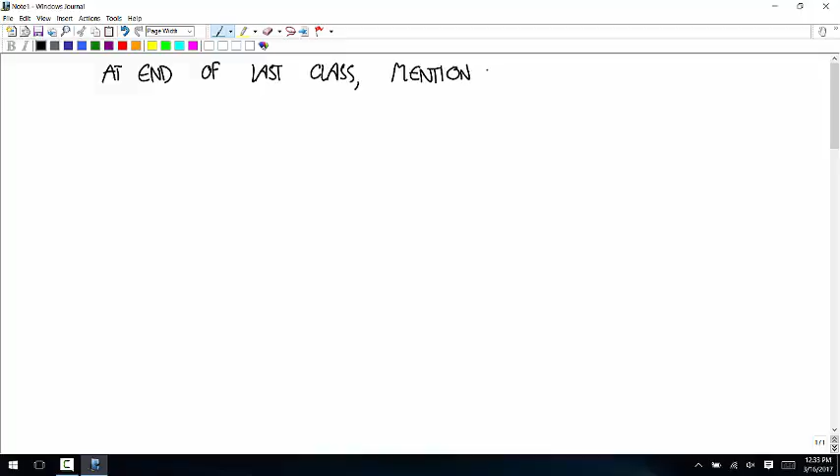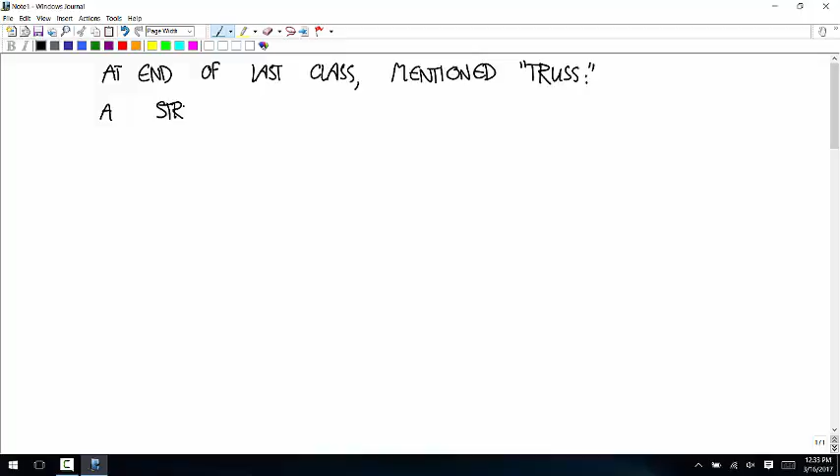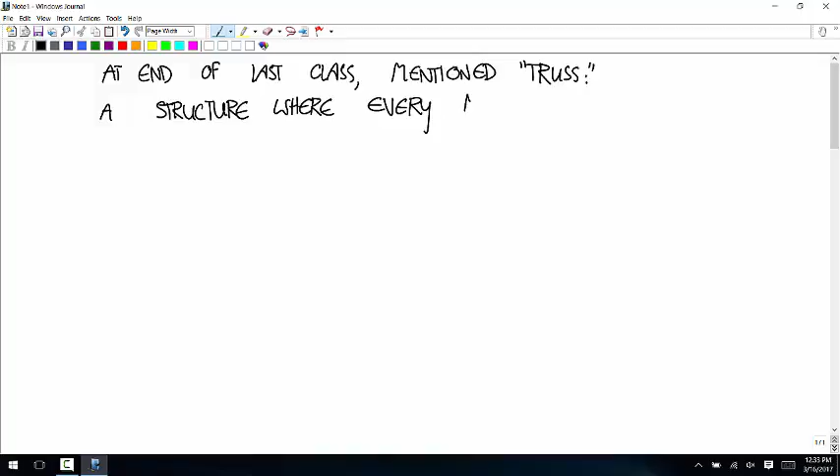So at the end of last time, I introduced this idea of a truss, a thing that's made out of nothing but two force members. So a truss is a structure where every member is a two-force member. Does anyone remember what's special about two-force members? Yes, they have to be equal and opposite, and they can either be away from each other or towards each other. And what that means is two force members are either in pure tension or pure compression.

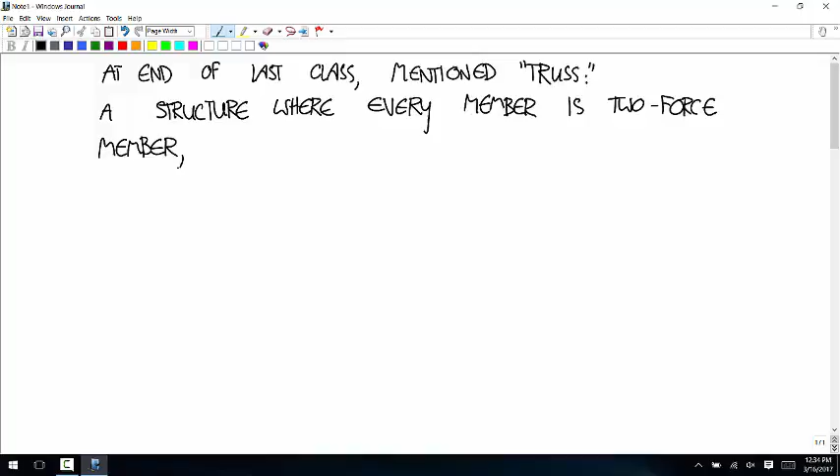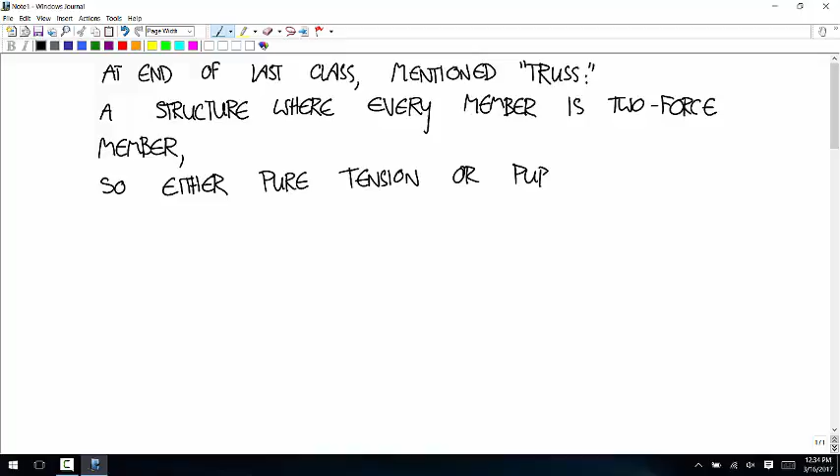So what I want to do is give you a truss, and I want you to solve it in little groups up at the board using the method we've talked about. Then when you're done, I'm going to go through it using the truss simplification. You'll see it is shorter, there's fewer equations, and you'll get the same answer. And then it's in your notes, so later if you take a class where you need to understand more about how the truss simplification works, you have something.

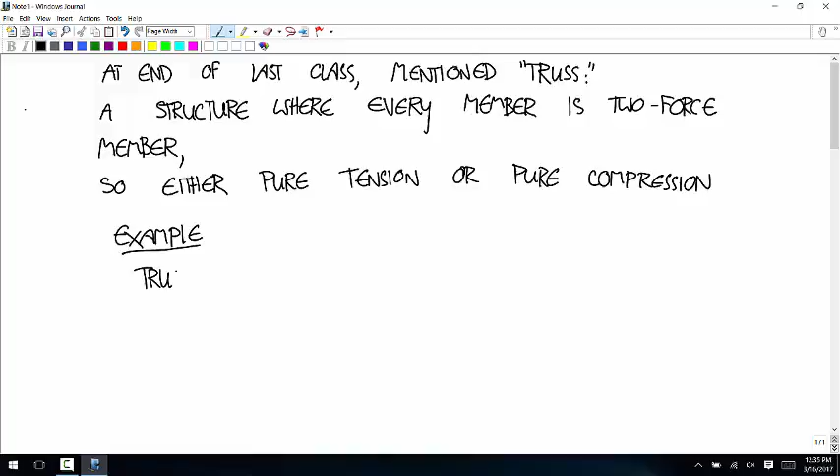So here's the example problem. Maybe the key thing to remember is that we treat it exactly the same as any other structure. We don't have to categorize structures into different things, like this is a truss, this is a frame, this is a machine. If you have a collection of bodies, you can solve it using the one approach that I talk about in this class.

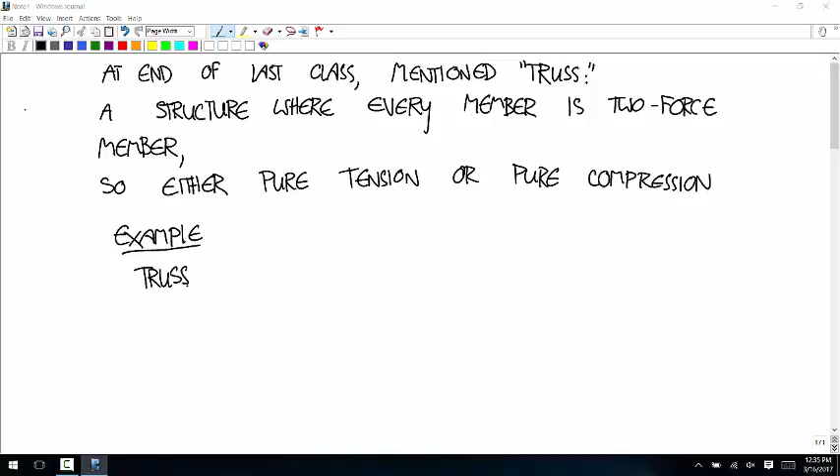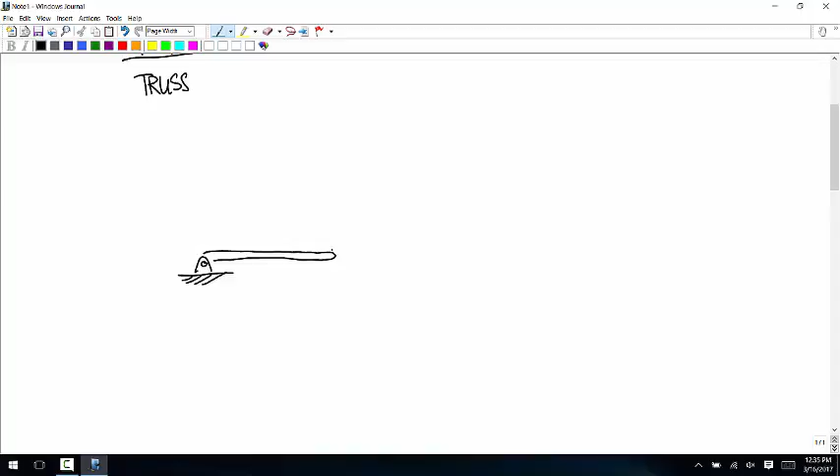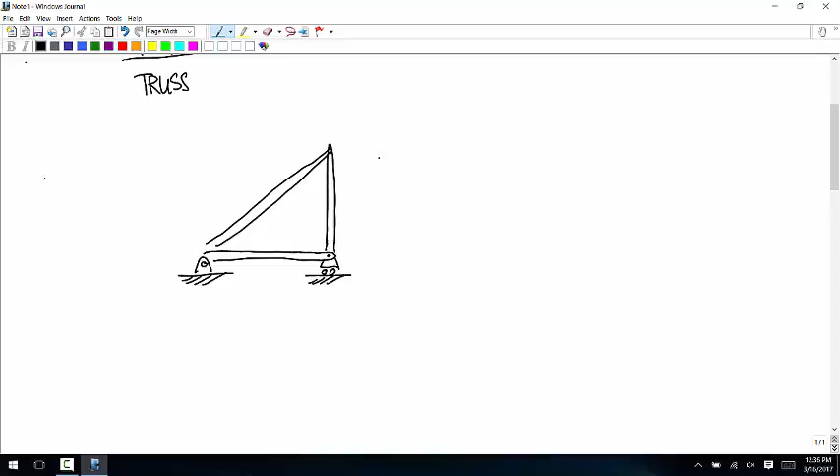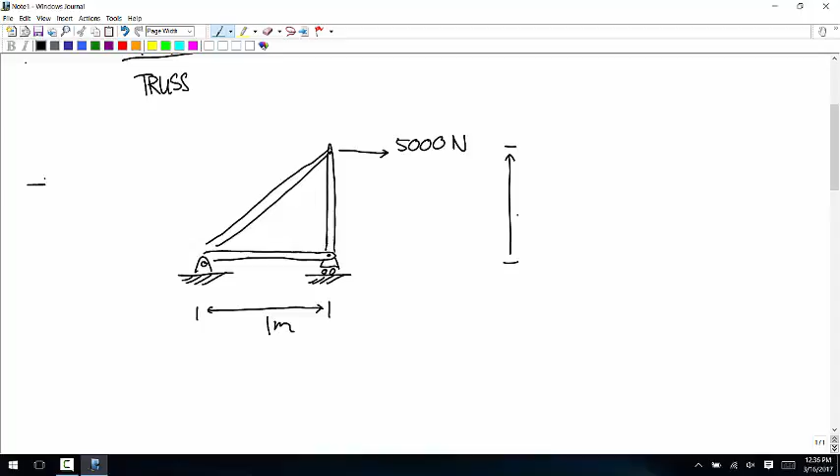Okay, so let's say there's one member like that, one member like that, and then a diagonal. All of these are connected by pins. And then this is a roller between that joint and the ground. Let's say there's a 5,000 Newton force here. You need dimensions, so let's say this is 1 meter, this is 1 meter. Each of these then, well, they don't have to be, but this is 45 degrees, that means this has to be 45 degrees. And then the length of this one is 1 times the square root of 2.

And I want you to calculate the external loads on each one of these members.

Okay, so you can number these however you want. Based on your numbering, your free body diagrams might look different, your variable values could be different. But at the end, when you take the variable values you've figured out and plug them back into the free body diagrams, the external loads on each member are going to match for everybody.

And what about the weights? There aren't any, and if it's a truss, there can't be any. That's a major problem with the truss simplification, you have to be able to ignore the weights. Actually, you always can ignore the weights, just a lot of times when you do it, your results don't make any sense, don't help anything. And that's one of the things you really want in a result, is for it to help you understand something.

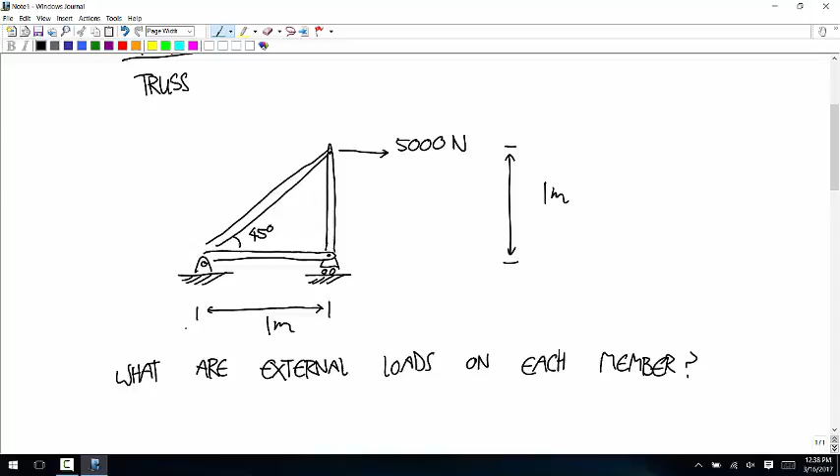Okay, that's all. Yeah, that's for sure. That's not really the only consideration in statics. Yeah, exactly, that should only be one of many considerations.

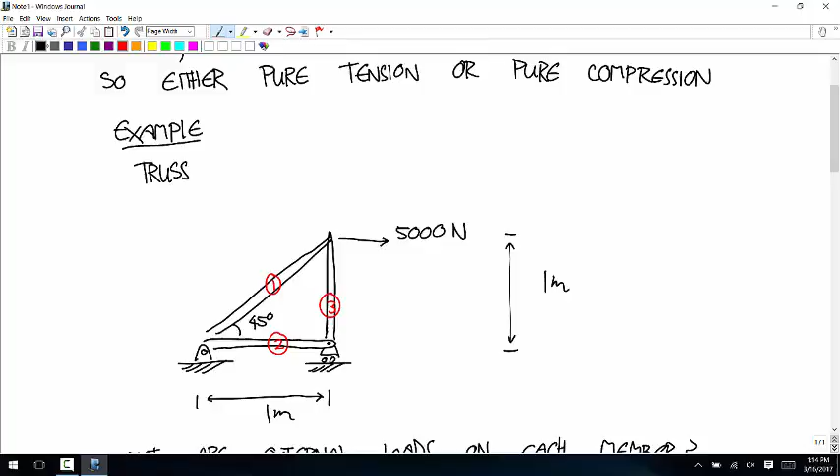Okay, so here's how I'm going to number it. 1, 2, 3. And then I'm going to draw the side views of each of those joints. So I'll call this joint A, B, C.

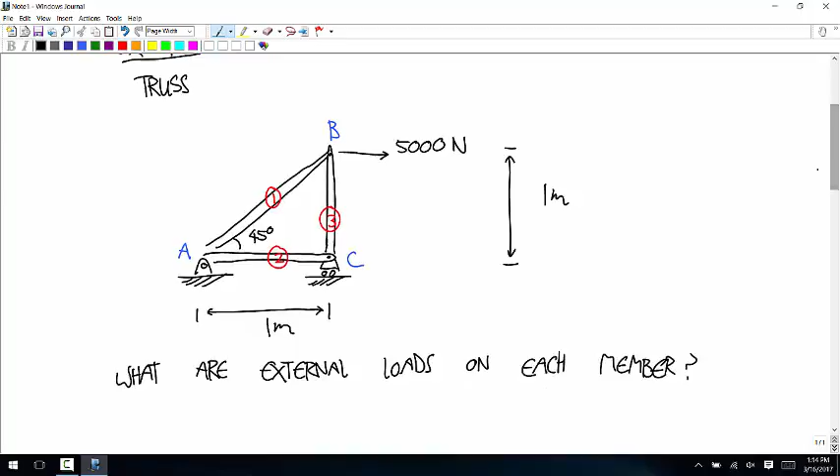All right, so at A, I'm going to draw the side view for somebody looking from over here. So at joint A, there is the base that's connected to the ground, then there's member 2, and then there's member 1, and all of those are connected by a pin. So this is member 1, 2, this is the ground. We're assuming that the pin is part of member 1, so all of the shaded region is member 1. And so when we isolate member 1, it's in contact with member 2 and the ground. When we isolate 2, it's only in contact with member 1.

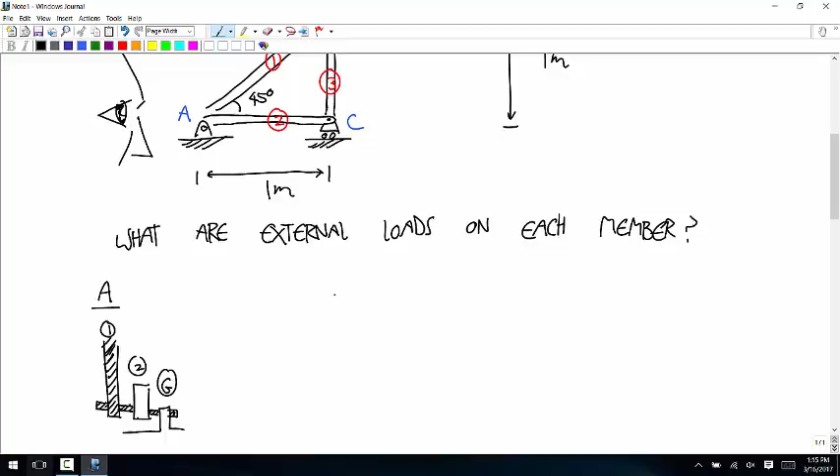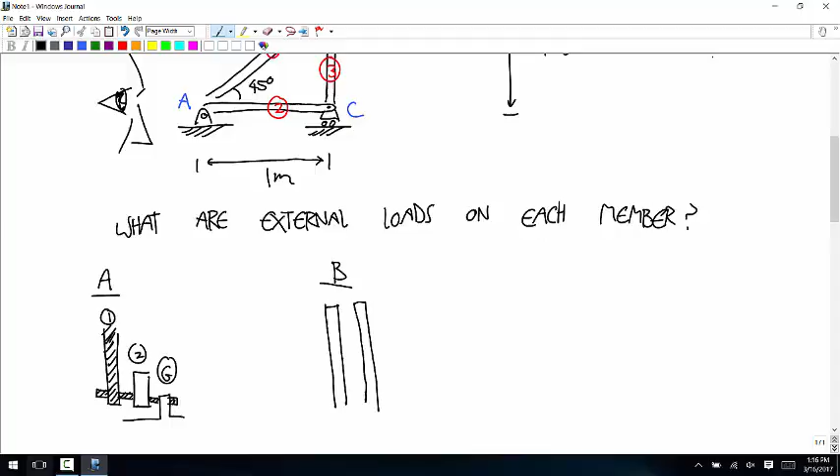And then the joint B, from this person's point of view, there's member 3, member 1, the pin going through them, and then the 5,000 Newton force acting on the pin.

This is member 1, this is member 3. We're assuming that the pin is part of member 1. So when we isolate member 1, there's a force from member 3, and there's a 5,000 Newton force. When we isolate member 3, the only force is a contact force with member 1.

And then joint C, we have the roller skate thing. Those are supposed to be the wheels. We have member 2, and then member 3, and the pin going through them.

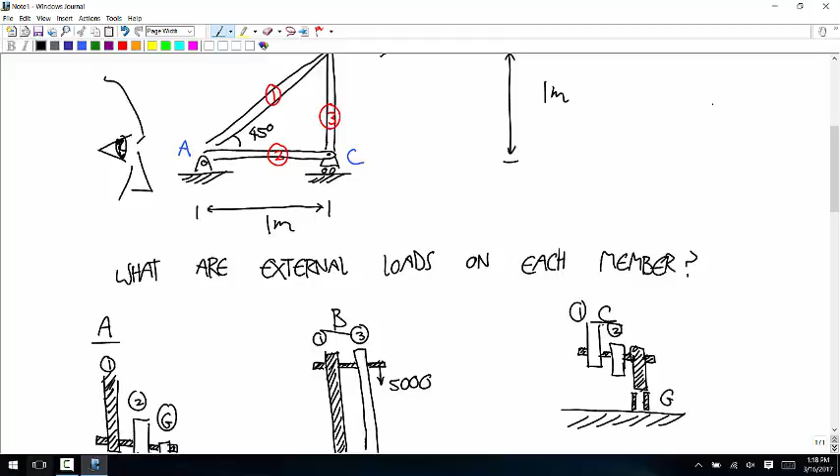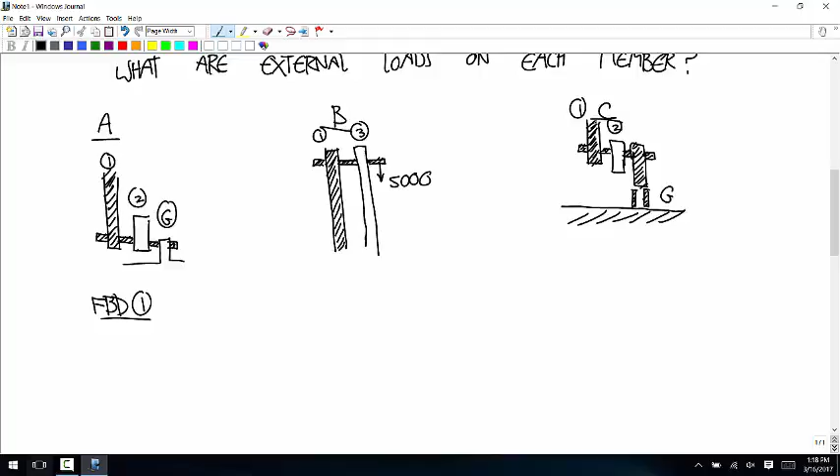Okay, so free body diagram of member 1.

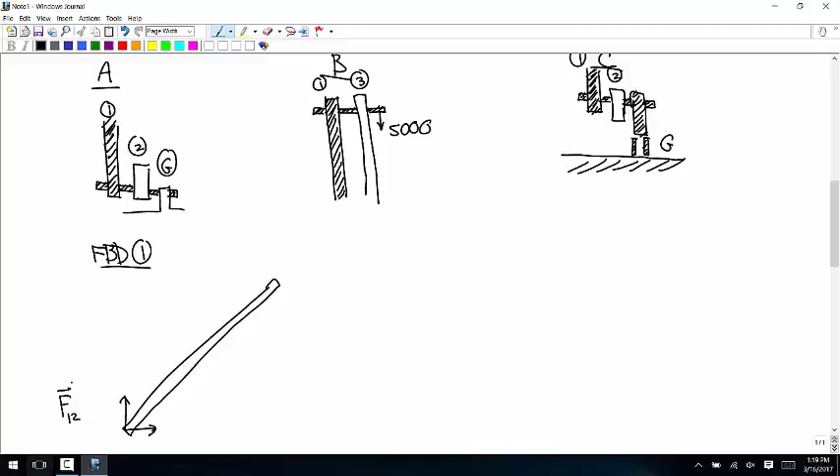Down here at joint A, we have a contact force from 2, so that's force on 1 by 2. And then we also have the force on 1 by the ground, I'll just call that RA. And then up at the top, that's joint B, so there's a force on 1 by 3. And then there's the 5,000 Newton force.

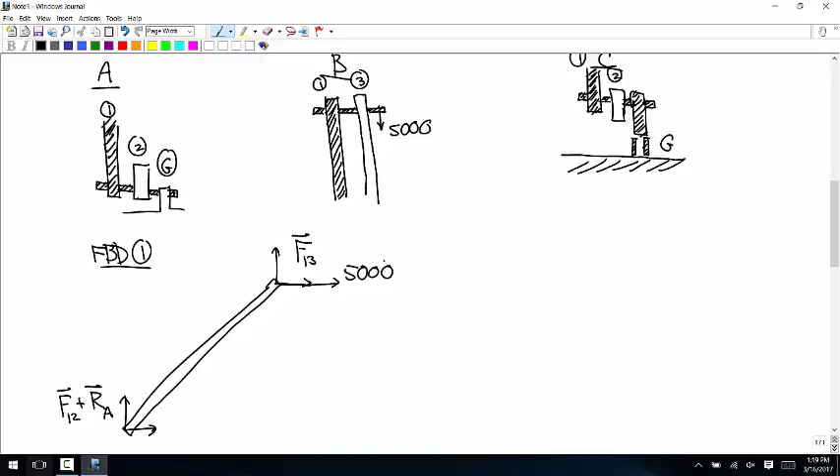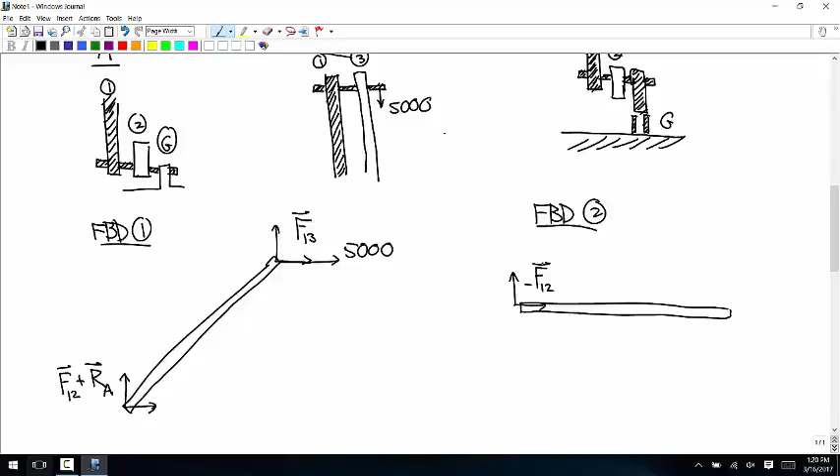Next, I'll isolate member 2. At the left end is joint A, touching 2 is only member 1. So over here we have the force on 2 by 1, or I'll write that as negative F12. And then at joint C, that's the other end, 2 is only in contact with 1.

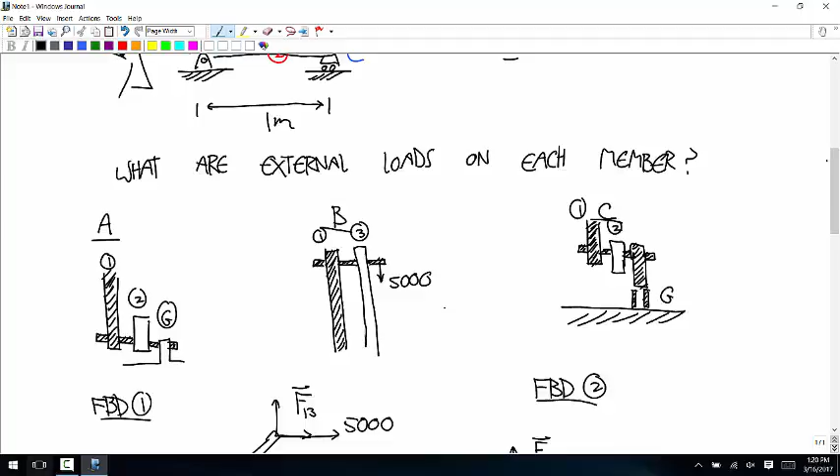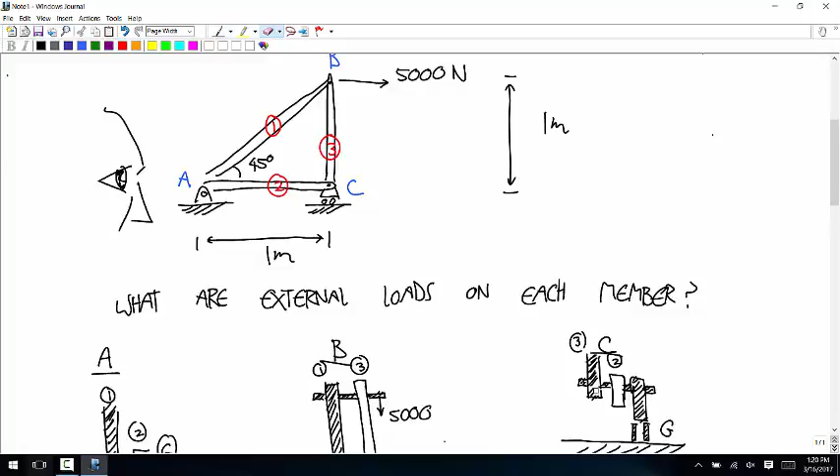Oh, I screwed up this numbering, didn't I? Dang it. This one should be 3. And that means I shaded the wrong one of these. Just erase it with your little electronic pencil, won't show up at all.

Okay, that's better. So the pin and the roller are connected to member 2. Any questions about what I just did there? So at the right end of member 2, there's a force on 2 by 3. And there's also the force that the ground applies to the roller, which is a vertical force like this, I'll call that RC.

And then member 3, at the top at joint B, member 3 is only contacting member 1. So there's a force on 3 by 1, or negative F13. And then at the bottom, that's joint C, member 3 is only in contact with member 2. So that's F32, which is negative F23.

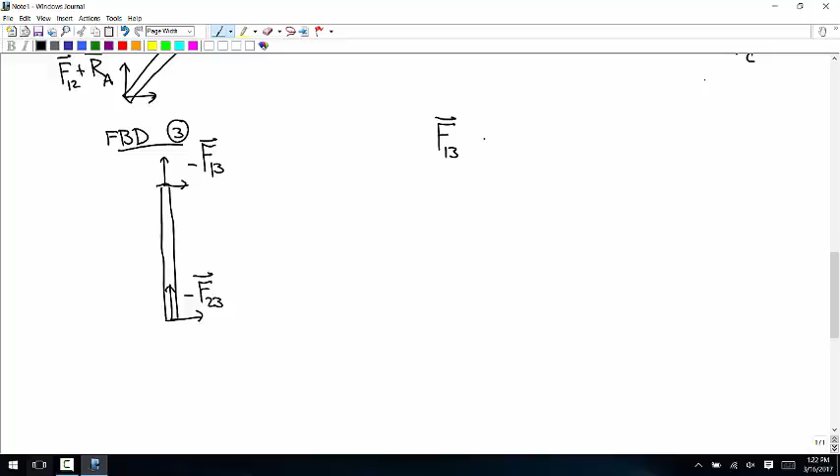And what you get here is F13 is equal to 0, 5,000. Zero, negative 5,000. F23 is 0, negative 5,000. And F12 is 0, 0. And then RA is negative 5,000, negative 5,000.

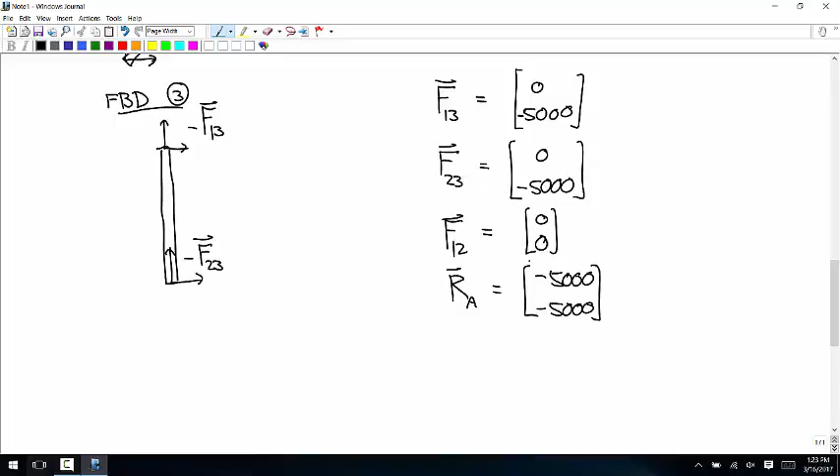F13. I think I wrote one of these wrong. F13, well, we're all going to get, is this the way you numbered yours too? Mm-hmm. Yep.

The diagonal one's in tension, yeah. So negative F12. F13 would be, okay, positive. So that's this. And RC was 5,000, right?

So do these all add up? So member 2, 0 over here, those two add up to 0. So it looks like that makes sense. 2,3 is negative 5,000 because on the vertical one it's negative F23 that's acting.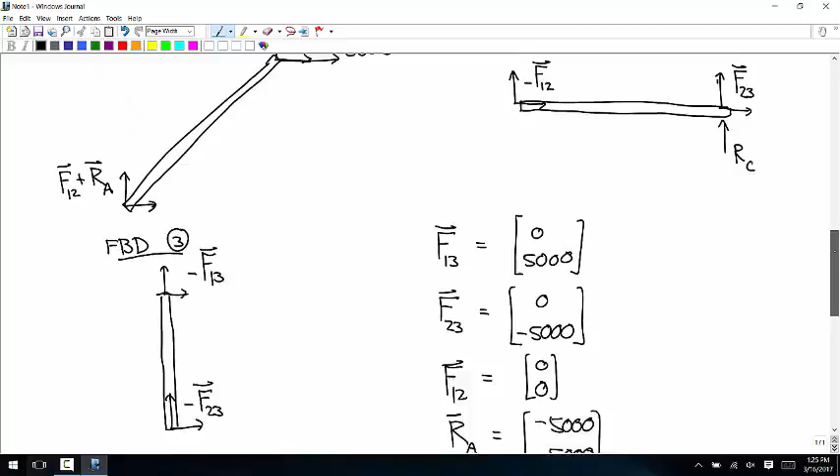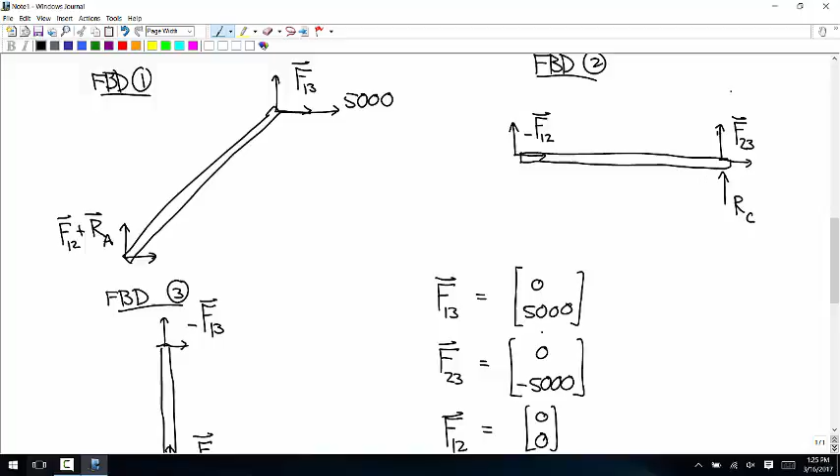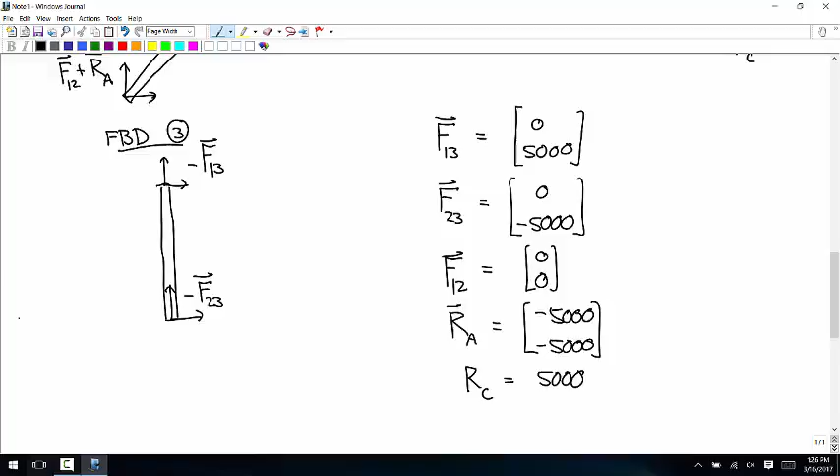Everybody's variable values are going to be different depending on the numbering. But now when we go back to drawing the external loads on every member, we end up with

this one in tension. What was the magnitude of? Did you ever calculate that number? Oh, that makes sense, that's yours. Okay, so 7071, 7071. Then the vertical member is in compression with a value of 5,000.

And then the horizontal member is just sitting there, it's not doing anything. So that's an important thing to realize with this: every single intermediate step depends on your arbitrary choices of numbering.

You don't have to do what I do, which is associating the pin with the lowest numbered member. But once you're done, if you go all the way through it, those external loads back onto the bodies, you'll see that when you total up the external loads, the bodies look the same. They have the same loads acting on them. And that has to agree.

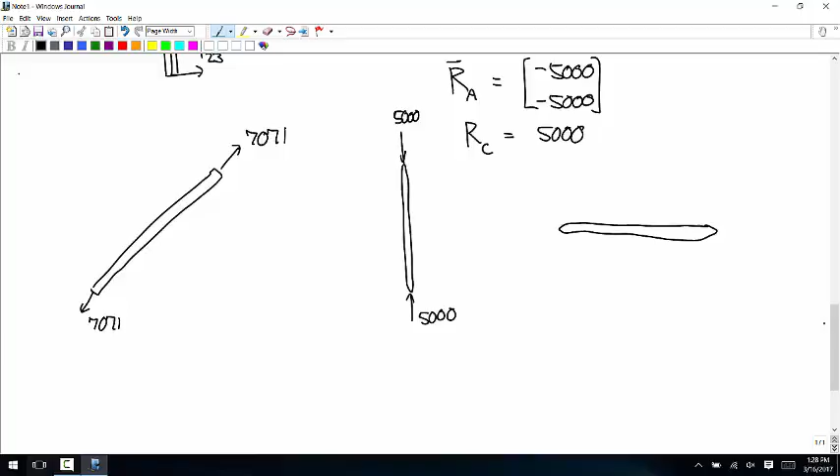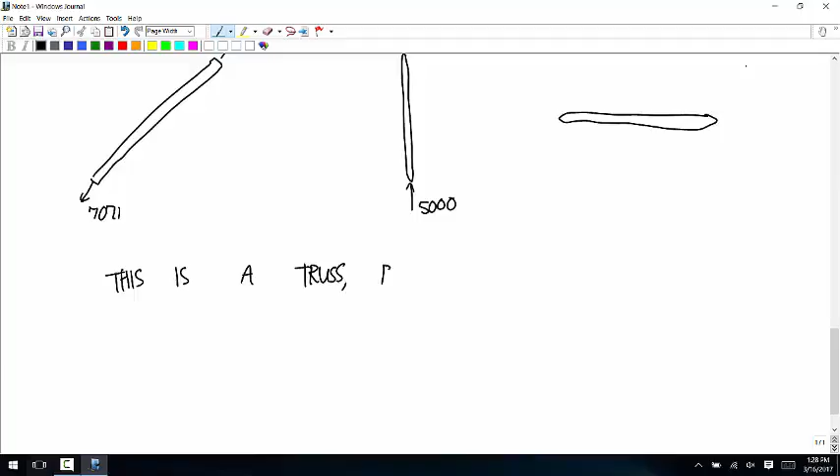Okay, so now we have those answers. I'm going to do this problem using the truss simplification. So this is a truss, because every body is a 2-force member.

Yep, and this is a way you're not responsible for in this class, but at some point in the future, you might want to have this in your notes to look back at it.

So the idea with a truss is, for this simplification, we're going to assume every member is in tension.

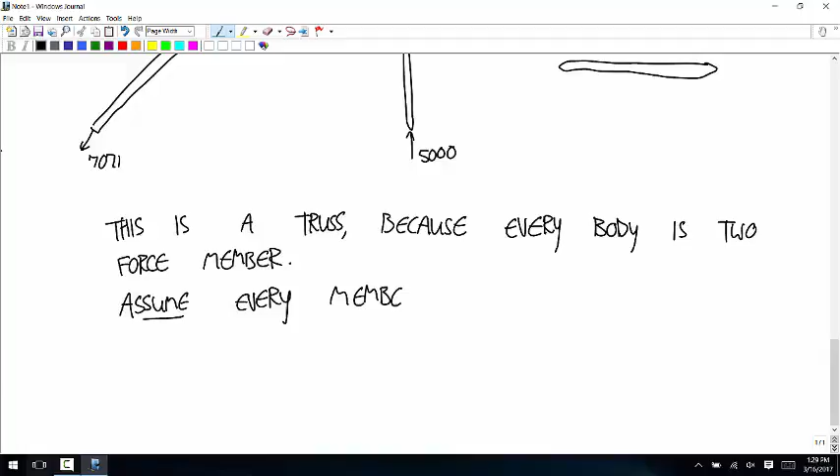And then, instead of isolating the bodies, we're going to isolate the pins. So we're going to isolate each pin and use Newton's second law. Those pins we're going to treat as particles, so rotational Newton's second law doesn't make any sense for the pins. But every pin is going to give us 2 equations.

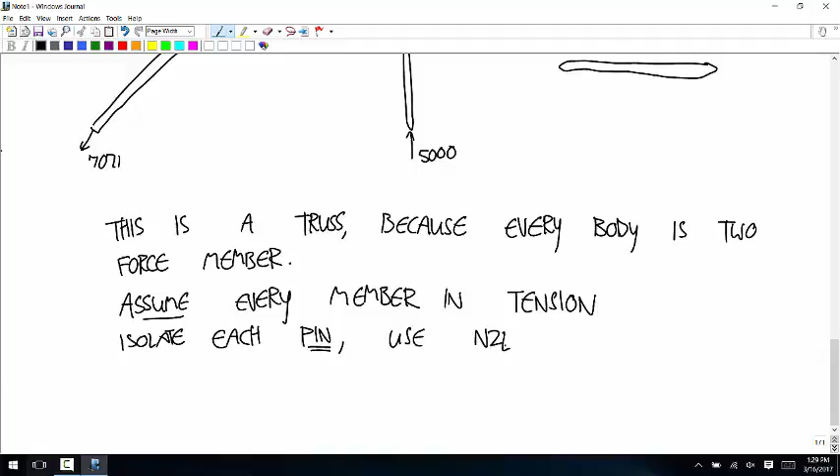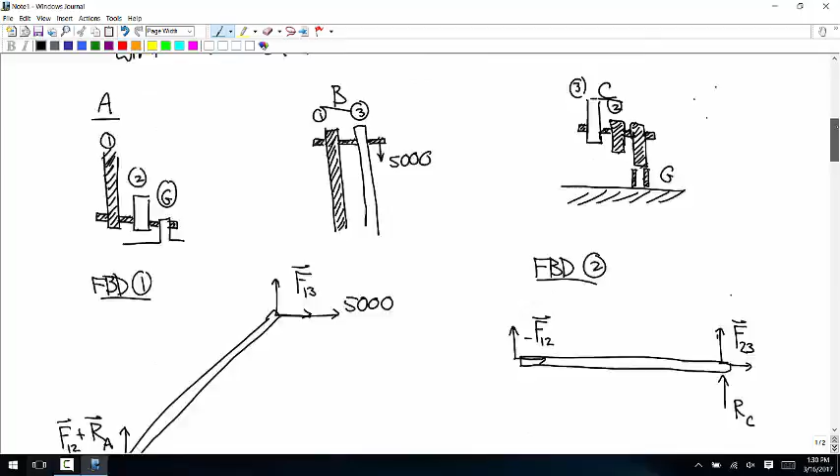Okay, so a free body diagram of pin A. Here's a blown up version of the pin. The loads acting on A are a force vector from the ground, so I'll call that RA.

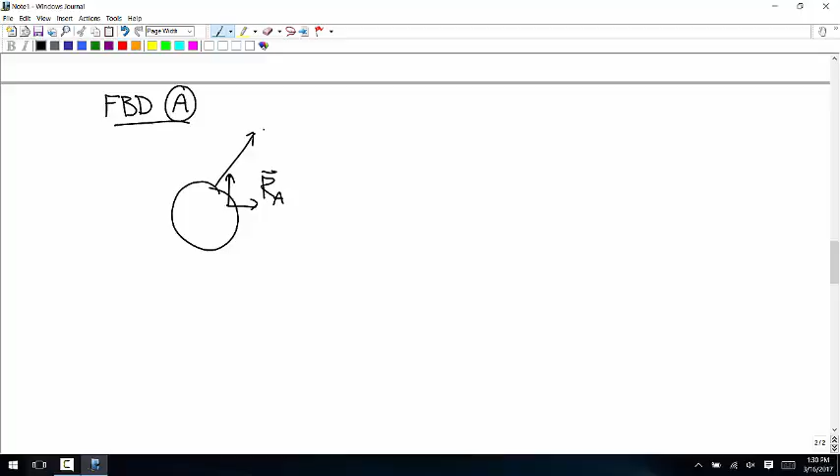And then if member 1 is in tension, it would be pulling on the pin this way, so I'll call that F1. That's the tension force applied by member 1. And if member, how did I number this? If the horizontal member, member 2, is in tension, it's going to be pulling on this pin this way. And so that's a complete free body diagram of that pin.

Yes, in the way I numbered it, yeah.

That's right. And so what we're going to find is that, when we do these calculations, what this is saying is, remember that diagonal member we calculated was in tension of 7,071? So we're going to get F1 is equal to positive 7071, which is saying that our assumption that it's in tension is true. F2 is going to be 0 because we got that that member wasn't in tension or compression. And then our F3 is in compression with a magnitude of 5,000.

So when we solve for that, we're going to get that our assumption that it's in tension was backwards, and we'll get a value of negative 5,000. So here's our first one.

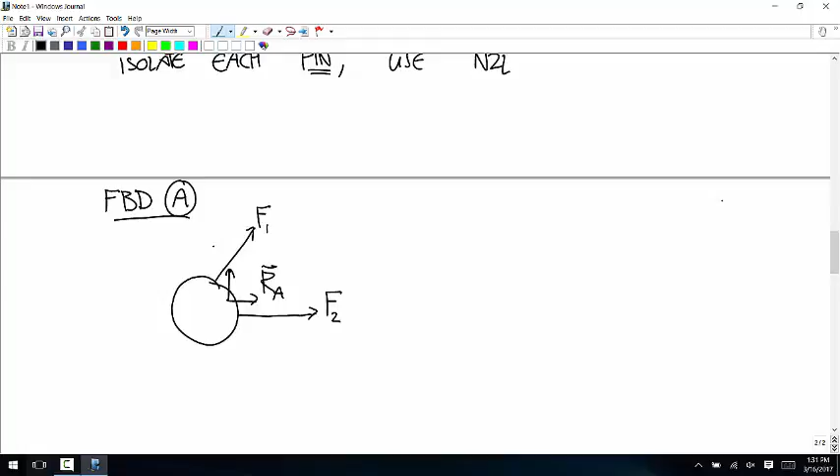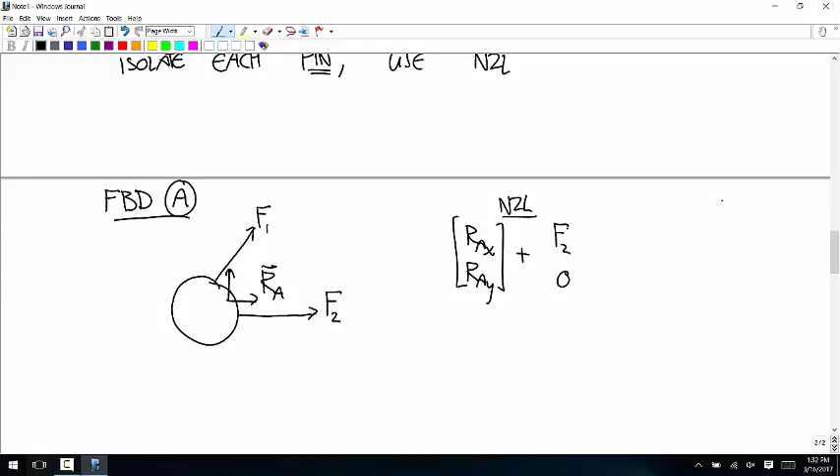So Newton's second law says RAX, RAY, plus F2, 0. Okay, so we have the force vector RA. F2 is in the positive x direction. F1 is at a 45-degree angle from the horizontal, so that's going to be 0.7071 F1, 0.7071 F1. And all those have to add up to be 0.

No, you can't just put F1 in the x direction and F in the y, because what we're taking advantage of with this truss simplification is that every one of these forces that the member applies to the pins, we know the direction. If it's not a truss, you don't know that, but if it's a truss, since everything's in pure tension or pure compression, you know those force directions are parallel to the members. That's what we're taking advantage of.

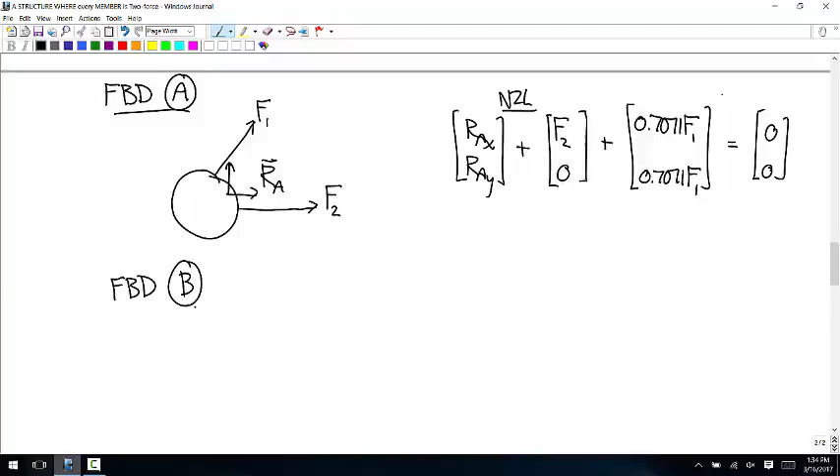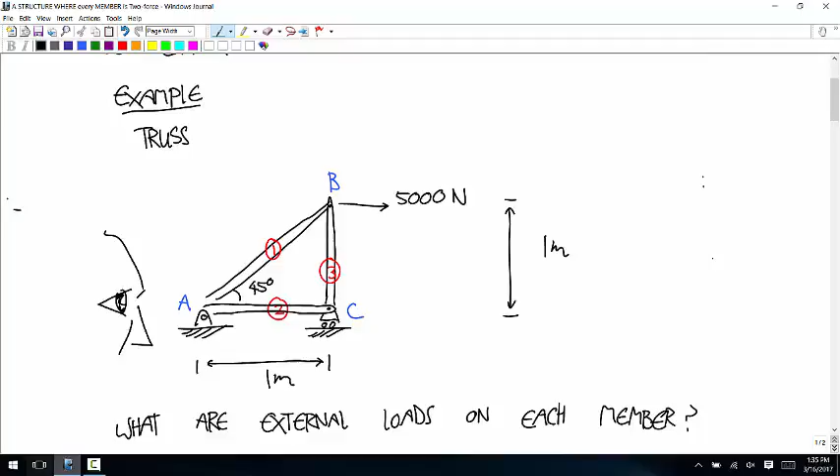All right, so now free body diagram of pin B. Pin B is up at the top. So what loads are acting on B? There's the 5,000 Newton force, and then there's the force from member 1 - I'll call that F1. If it's in tension, it would be pulling that direction on the pin. And then there's the force F3 going down.

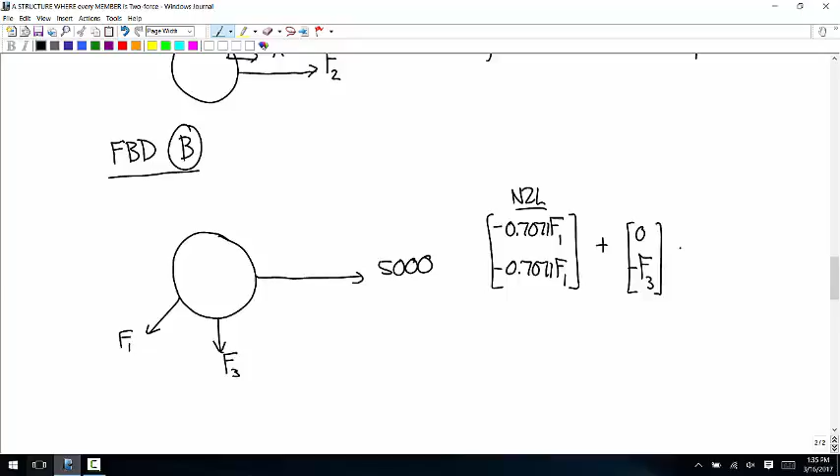So Newton's second law says negative 0.7071 F1, negative 0.7071 F1, plus 0, negative F3, plus 5,000, 0, equals zeros.

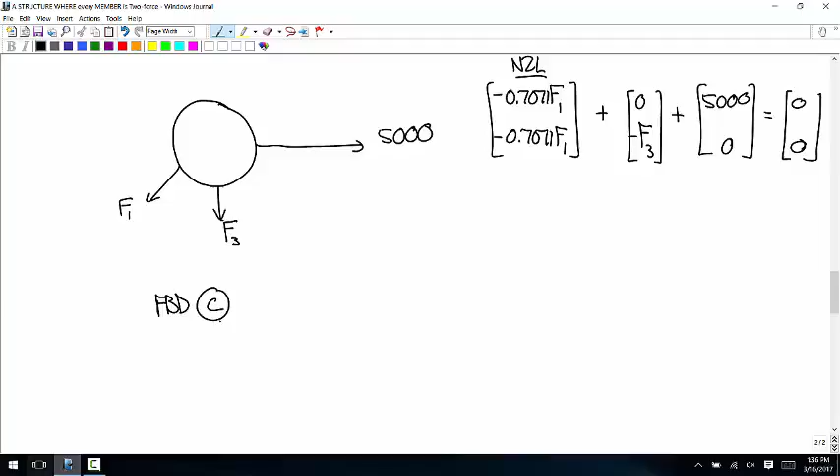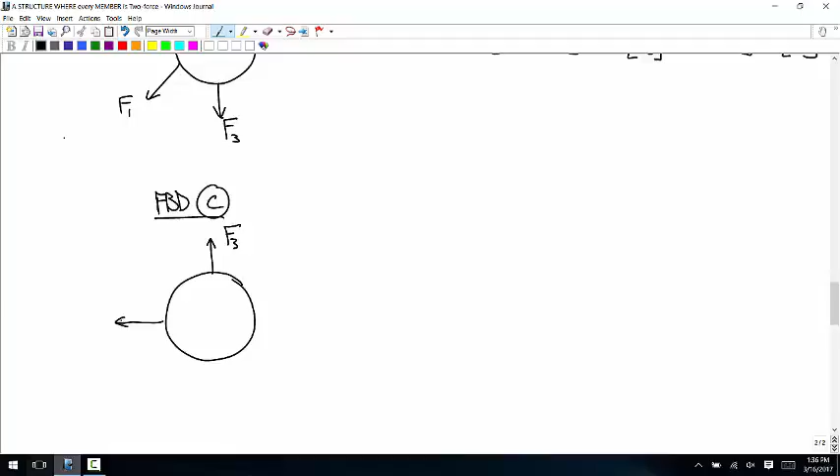And then the last one, we have to isolate pin C. So that has member 3 pulling up on it, so F3 up. Member 2 pulling to the left, that's F2. And then the roller applying an upward force, so that's RC.

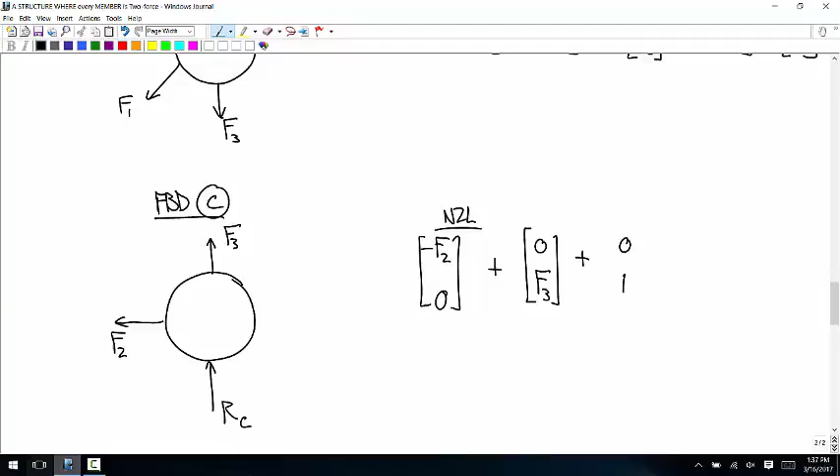And so Newton's second law says negative F2, 0, plus 0 F3, plus 0 RC is equal to zeros.

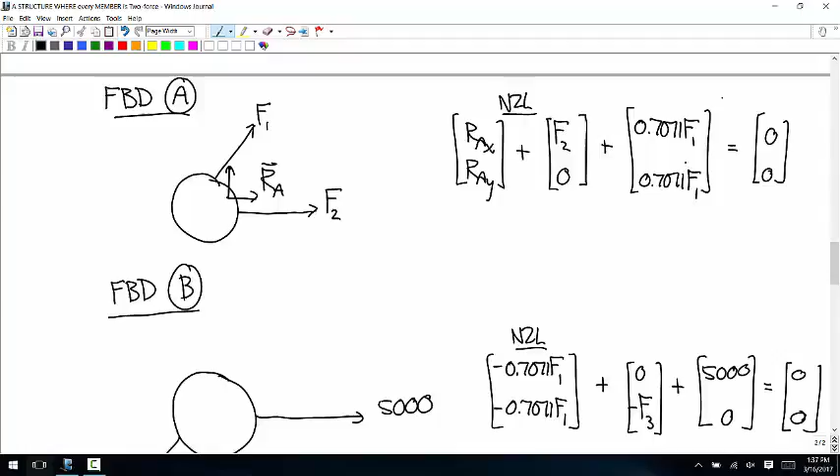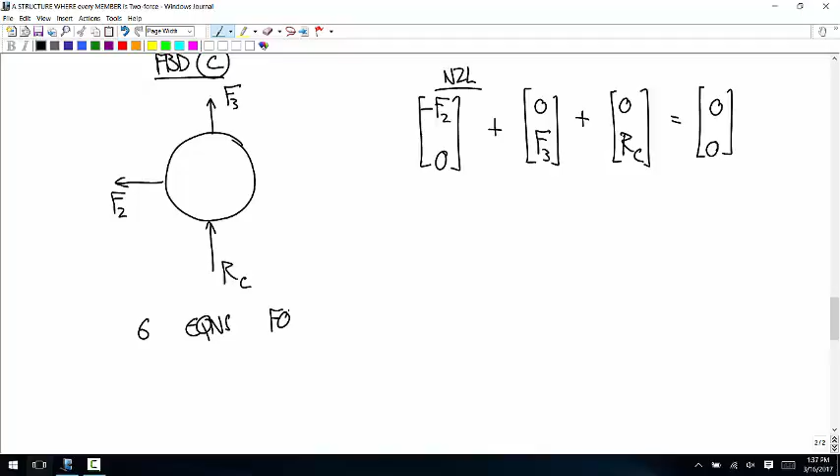So that's 6 equations, 2 equations for each pin. And the variables we have are 2, 3, 4, 5, and RC is 6. So that's 6 equations for 6 variables, compared to 9 equations, 9 variables for the full method.

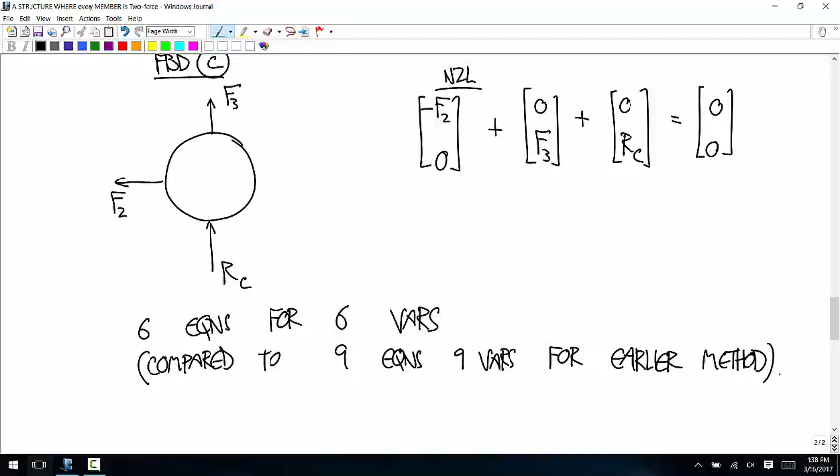Okay, so we're assuming every member's in tension - that's how we choose the directions of those forces. And if they don't end up being in tension, if they end up being in compression instead, that's fine. We just get negative answers for that variable, and then we know it's in compression.

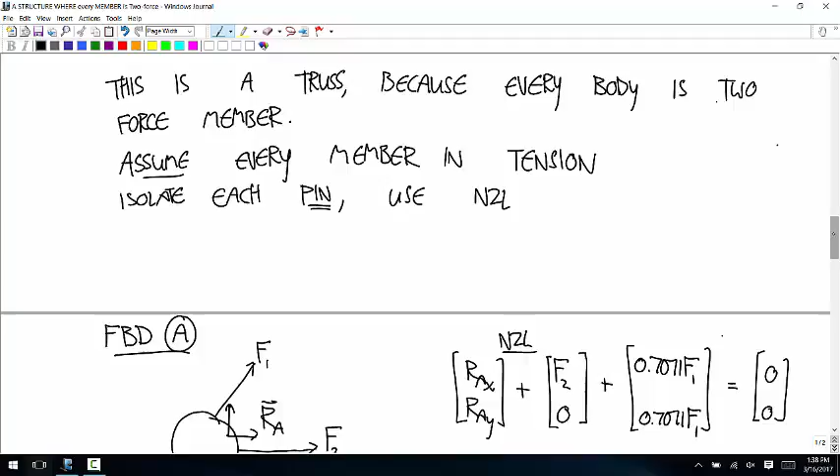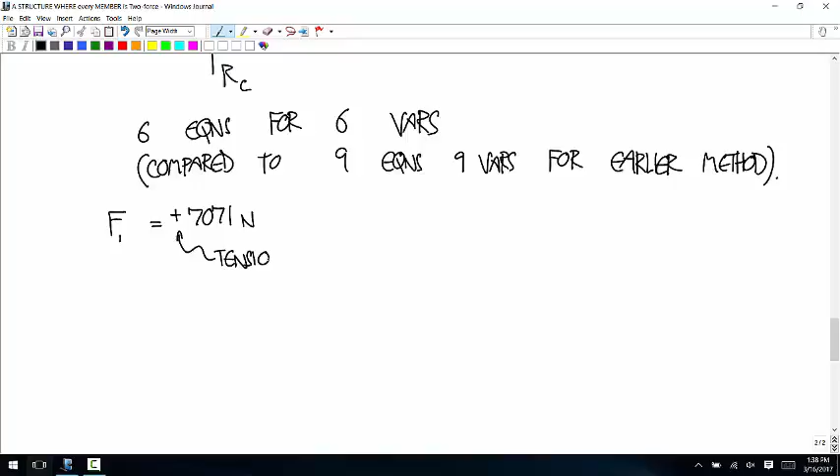And so what we get, if you solve this system of 6 and 6, you get that F1 is equal to positive 7,071 newtons. That positive means tension. F2 is 0. And F3 is negative 5,000.

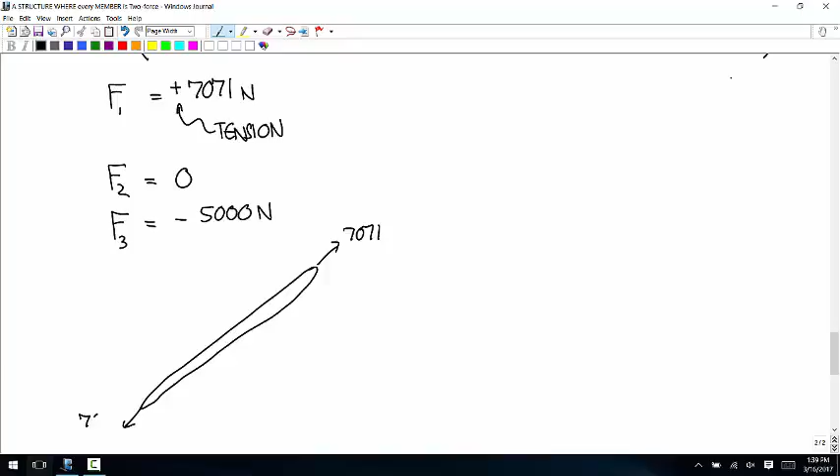So in other words, if you drew the free body diagrams of these members, member 1 is in tension with a magnitude of 7071. Member 2 has nothing acting on it. And member 3 is in compression with a magnitude of 5,000.

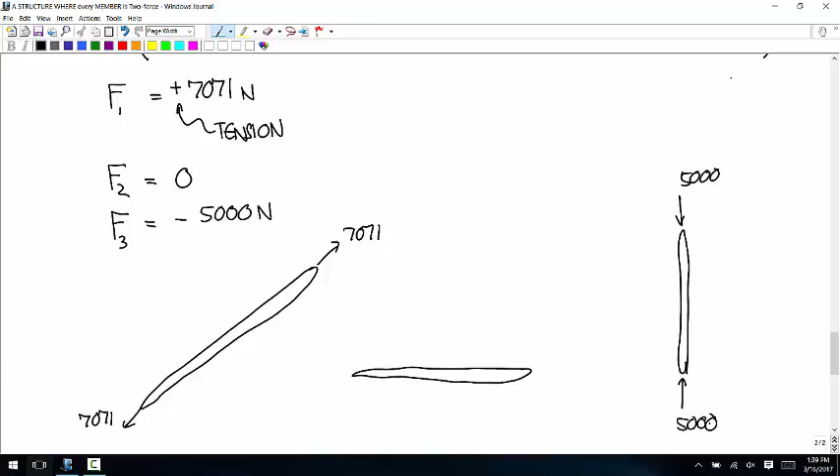Nope, 2 is just like it's not even there. For the free body diagram for pin A, we drew force F2, positive x direction, but there's no - I thought there were no forces. Or did that F2 just end up being... Oh, that's just, we solve for it at the end and we get 0.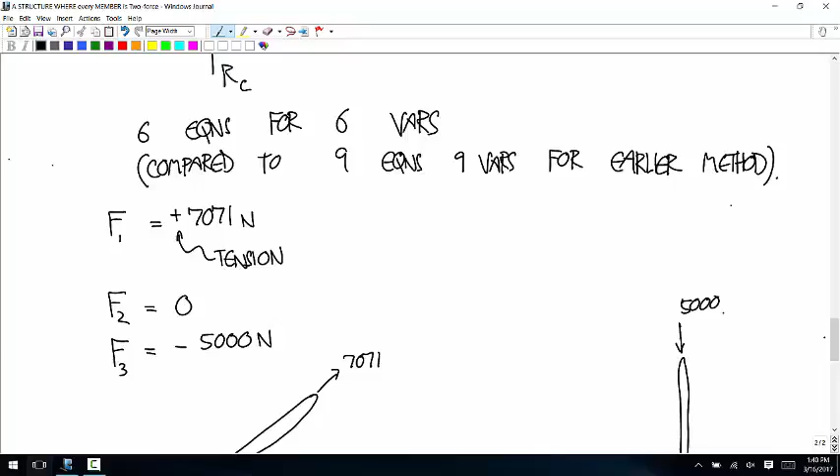So we assume that it's something, we assume that it's in tension, and it'll just come out and give us the values that tell us. And so notice that when you get to those external loads at the end, it tells us the exact same story that the full method told us. It just took 3 fewer equations, which really isn't that much of a benefit, you know?

As I say, at least for me looking at this, I like the longer version. You don't have to use cosine and sine, but to me it's sort of a no-brainer. The full method kind of intuitively makes it clear what's happening, I think, and it works for every kind of problem. This works for a select number of problems.

But if you're doing calculations by hand, and especially if you're in a class where you have to do a truss calculation by hand that has 15 members in it, you would get enough benefit out of using the truss simplification that it's worth doing. But why would you ever want to do a 15-member truss by hand? There's software for it and whatever.

And treating it as a truss in the first place makes assumptions that will make your results less accurate. So, anyways, that's the truss approach. It's in your notes - if you need it for a later class, go back and look at that. Other than that, I'm never mentioning it again.

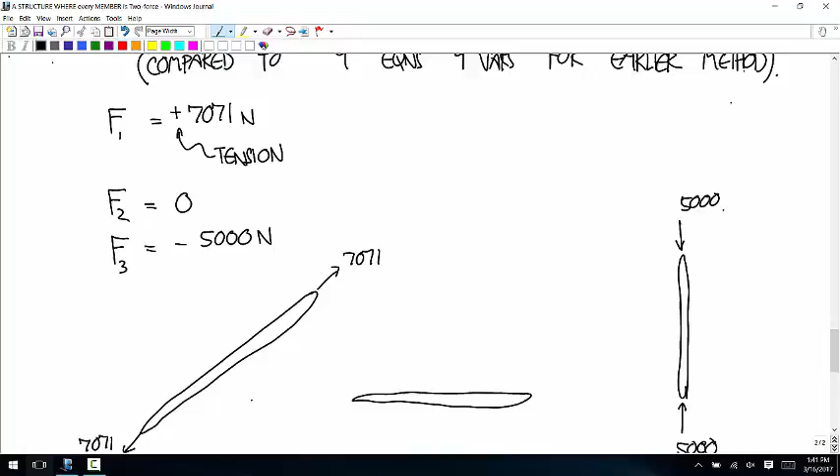Any other questions about that method? That's good, because I'm never mentioning it again. So we'd just be sitting here awkwardly.

Right. Well, I think let's stop there. And then next class, we'll do one more example of a structure, and then we'll go on to the next stuff.